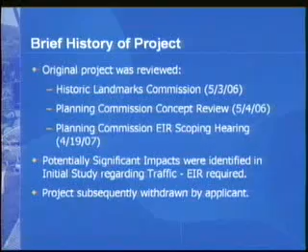Subsequently, the project was withdrawn by the applicant, and a new revised project was submitted. This new revised project has less commercial square footage, the elimination of the live-work units, less parking spaces, and a new traffic analysis was submitted along with the revised project.

Staff reviewed the new project and a new initial study was prepared. No potentially significant impacts related to traffic were identified with the new revised project, and all other potentially significant mitigable impacts remain the same as the previous project that you reviewed. The result is that an EIR is not required and that a mitigated negative declaration was prepared.

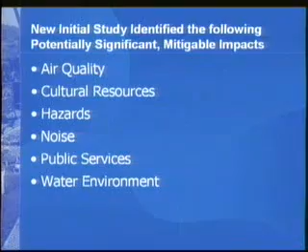This is the same from the previous project. The new initial study identified the following potentially significant mitigable impacts in these areas: air quality, cultural resources, hazards, noise, public services, and water environment. And like I said previously, these are all the same that were included in the original initial study.

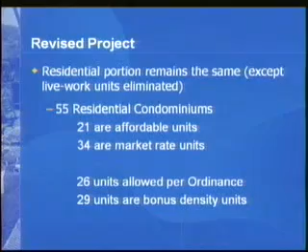A brief overview of the revised project. The residential portion remains the same except for the live-work units, which were eliminated. There continues to be 55 residential condominium units, 21 affordable and 34 market rate. There are 26 units allowed per the ordinance, and 29 units are bonus density units that are being proposed.

For the commercial portion, like I said previously, the elimination of the live-work commercial areas are part of the new project. There's an overall reduction of 10,874 square feet of commercial space, and there's a reduction in the number of parking spaces from 175 to 149.

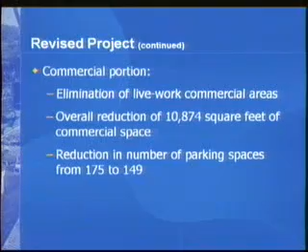The next steps for the project: Today we have our environmental hearing to receive public comment on the draft MND. We will accept written comments through February 4th. The project will then return to the Historic Landmarks Commission. We have a date set for February 6th.

The proposed final MND will be prepared, and we will include responses to the public comments that we received today and through February 4th. Following that, the Planning Commission hearing will be scheduled to consider the final MND and for project approval.

You've received a copy of the HLC minutes from the December 12th meeting. In response to those comments, the applicant has prepared an alternate proposal, and you've received a copy of that in your packet. That consists of 31 residential units. The applicant has requested that the alternate be allowed to be presented today during this hearing. The staff is requesting that you provide comments on the alternate proposal along with the comments on the initial study. That concludes staff's presentation at this time.

Thank you. Thank you, Ms. Kennedy. Are there any questions for staff at this time?

Seeing Mr. White. So, Ms. Kennedy, I'm understanding that the second proposal has not gone back to HLC. Is that right? Right, the alternate that's on the green sheets has not been to HLC yet. And actually, staff has only reviewed it briefly. We have not had a total review by all staff members.

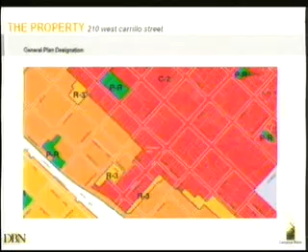I do have with me today Ian Brown from the client organization, Katie O'Reilly-Rogers, and Gerhard Meyer, the lead architect on the project, to answer any questions that you might have. Before we get into it, just an orientation - the project is located on the corner of Carrillo and De La Vina. If I can get technology to work right here.

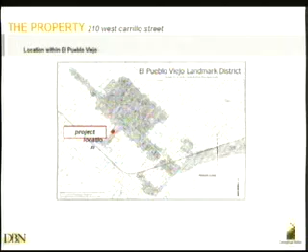And I believe you had a site visit on Tuesday morning, is that correct? That's correct. The project's location relative to El Pueblo Viejo - you'll see the main El Pueblo Viejo area here, and then of course the spur out to Carrillo that encapsulates the downtown area, or the entrance to the CBD. The site itself is an ideal site for transit-oriented smart growth and sustainable development. It's approximately 1.2 acres, 200 feet squared, zoned C2. It's currently a multi-tenanted retail site, and it's a perfect infill opportunity site. It's located on primary transit corridors.

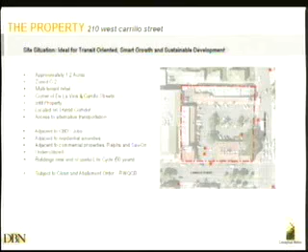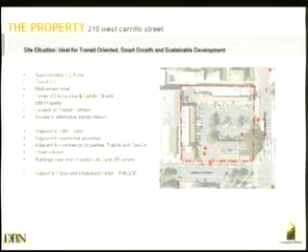It's very contiguous to the local MTD, or the central MTD facility, and other alternative transportation. It's adjacent to the jobs in this community. It's adjacent to many amenities, as you'll see later. And it also is adjacent to commercial properties like Ralph's for food, grocery. It's adjacent to CVS Pharmacy for access to drugs and things. So residents of this site will have wonderful contiguous amenities available to them. The site is currently underutilized. The buildings are near the end of their useful life cycle.

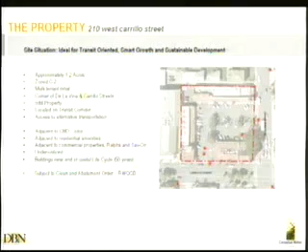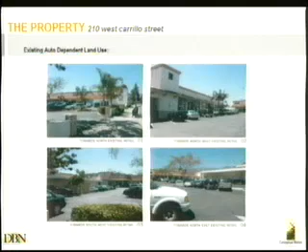And importantly, the site is subject to a cleanup and abatement order by the Regional Water Quality Control Board, and they've been very tolerant with us in terms of the time we're taking thus far on the project to bring it forward, knowing that development of the project is a better mitigation of the brownfields than to try to remedy in place. The existing site is an auto-dependent land use, and it's a product of its time. I know you're well aware of the site, so I won't go on too far from there.

Where we are today - we originally submitted the PRT for this project in November 2005, and as Kathleen said, we reviewed the project with you at the HLC in May 2006. At that time, our conversation in the community was all about housing, if you'll remember, and we were working very hard to see how we could deal with variable density to bring more affordable and smaller units to the community to really respond to the needs of the workforce. After we received your input in May, we developed the application, submitted a formal DART product, and then came to you for an EIR scoping hearing in April of 2007. At which time the focused EIR on traffic was deemed necessary, and we were moving forward.

Well, towards the end of the year, or close to the end of the year, we still hadn't gotten a consultant on board, and we'd recognized the impacts that were potential from the traffic, and we felt it was important to modify the project and bring the intensity of the project down to reduce any potential for traffic impacts. So we did that, and here we are today with the revised program. We will be going back to HLC on February 6th, and your guidance today will really help us, and we hope help the HLC in their deliberations on that day.

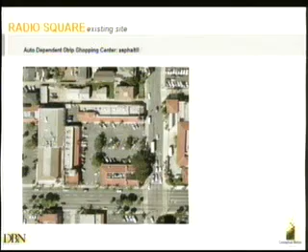The organising principle behind this project from day one and still today is the Paseo and Plaza system that El Pueblo Viejo and the Urban Design Guidelines speak so loudly to, and we continue to retain those elements in the project, whatever decisions and choices we made.

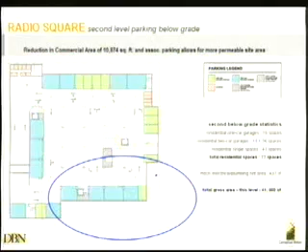One of the advantages of reducing the commercial program is we still park per ordinance, but we reduce the overall footprint of the garage, and it gives us more permeable parking, permeable site area for water quality management, etc. So there are some advantages to this program.

Graphically, you'll see here, this was originally commercial, this was originally commercial, and these units here were the live-work component, and they've simply been reclaimed by the residential program. That's how you see that difference made in order to reduce that 10,974 square feet.

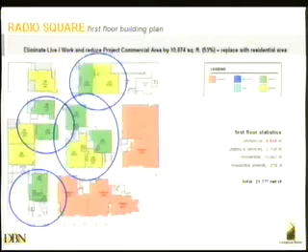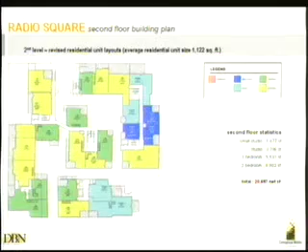Second level, we revised the residential unit layout. The average residential unit size is still 1,122 square feet. It's still small by standards that you're used to seeing and well below your thresholds. And that's also true of the third level and the fourth level.

Some of the comments that have been responded to as the 55-unit design was developed: we reoriented the fourth floor masses towards the project interior. We reduced and varied plate heights throughout the project. Carrillo went from 17 feet to 14 feet plate heights, and the top of the roof on Carrillo was lowered to 50 feet. And you'll see we increased the size of the plaza and simplified the architecture throughout.

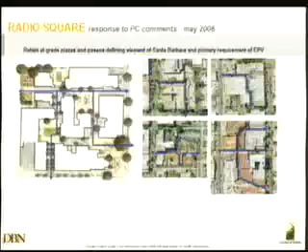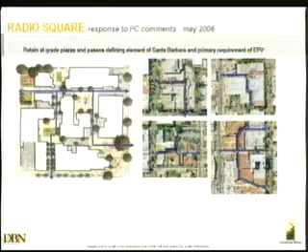To give you an example of the DNA of the project, the plaza system - you see the blue lines indicating the transit routes through the project, and by way of comparison, you can see La Arcada here on the top left. This is the paseo between the hotel that leads down through the back of the State Street properties to Paseo Nuevo, and it connects into the Paseo Nuevo system, and of course this is El Paseo.

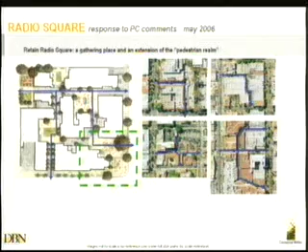So we just wanted to show you quickly and graphically how this project is responding to that central DNA of Santa Barbara, and of course we retained the generous setbacks, particularly at Radio Square.

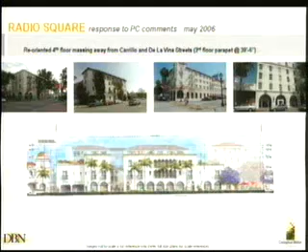Here's a view of the elevations of that project, and you have them in your package, relative to some of the other projects on major corridors in the city of Santa Barbara. It's showing you stylistically and in terms of massing how we're responding to those.

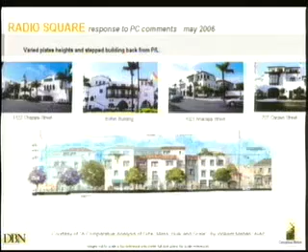And of course, De La Vina is a different environment, and Gerhard will talk about that later. But it calls for a different architectural response. And we've used some photographs here of existing buildings to give you a sense of compatibility with the characteristics of Santa Barbara.

Bill Mahan, when he was planning commissioner, put together a wonderful package that allowed us to quantify and qualitatively analyze our projects for compatibility. He used a term called vertical envelope analysis, or EAR. And this is how the 55-unit project stacks up against that analysis.

You'll see here, if you had an EAR of 0.6, it would be considered high, and 0.4 would be considered low. And the 55-unit Radio Square project was an EAR of 0.54.

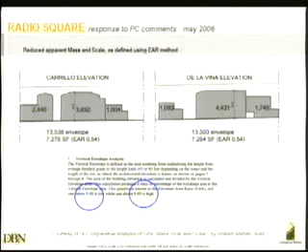I think it's all right.

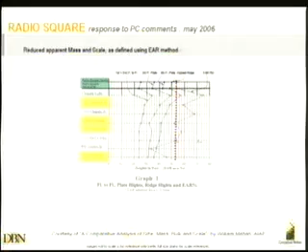The other way to look at this is in graph form. You can see across the top the first and second floor plate heights through to the highest ridge and the EAR. This line represents Radio Square's EAR relative to Chapala Lofts, 1021 Anacapa Street, Chapala Street, the Balboa Building, 1123 Chapala Street, and 2323 De La Vina. We find this a really useful tool as we're designing to see how we're doing.

In addition to the character sketches and perspectives, another way to look at the project is average setbacks. In C2 we don't have any required setbacks, but to give you a sense of the fourth floor, it sets back off of Carrillo on average 41 feet, off of De La Vina on average 16 feet 9, the west boundary 17 feet, and the north boundary 28 feet. So it really sets back in there. You'll see data in your packages showing it occupies a lot coverage of about 39%.

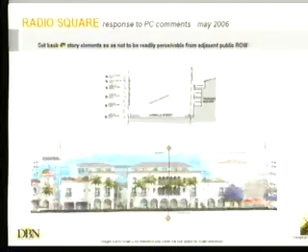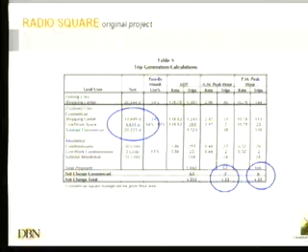One of the things we look for, in your comments with a setback, is that the fourth-story elements are not readily perceivable from the adjacent right-of-way. This is how that works: when you get a pedestrian on the other side of the right-of-way looking at the project, you can see it in section through Carrillo, and the advantage of that step back. You see the same thing on De La Vina, where a third-story parapet basically takes the apparent mass of the fourth floor away on that street, and you'll see that condition throughout. Those are important because they relate to the aesthetics study component, but this is really where most of the impact is.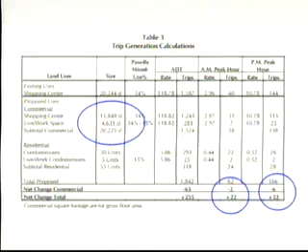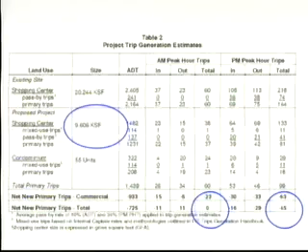We originally had 20,200 square feet of commercial in the project, and the initial study showed we expected about plus 22 trips AM and PM peak hour, distributed through the intersections. It was going to exceed thresholds, so we pulled those back. The commercial program now calls for 9,606 square feet. We have no additional AM peak hour trips, and our PM peak hour trips are reduced by minus 45. So there are quantitative measurements showing we're able to modify the project to a point where we wouldn't have cumulative impacts.

So on April 19, the mandatory findings of significance called for the potential for those impacts, and the document you have before you today has taken that potential away in the mandatory findings report.

I will get to that other point.

A lot of time has gone by since November 2005, and particularly over the last few months we've been getting a lot of feedback from the community and the constituents. We talk to them all and actively engage with them. Since we submitted this project, we went back to HLC in December 12, and they basically hardened a stance against the project, effectively saying it will not meet the HLC guidelines or ordinance requirements. The project is too big and not compatible with the neighborhood or the preservation ordinance, neighborhood preservation ordinance, and the urban design guidelines.

The massing is too large and would benefit from a reduction in the number of units. They'd like us to refine and keep the Plaza and Paseo elements, keep Radio Square on the corner, retain the below-grade parking, and retain the pedestrian experience that is such an important part of the project, and we will always do that. They indicated the additional affordable housing was not supportable as an offset against the larger project, and they were very clear about that.

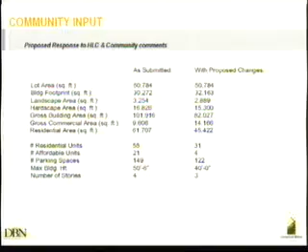The result is 31 residential units using the variable density model and 15% affordable housing, which is 4 residences. Our parking spaces come down to 122, and that's per ordinance, and our maximum building height and maximum stories are 40 and 3 respectively.

I'll have Gerhard go through the plan, and then I'll come back after that and continue the comparison.

Which plan are we going to see - changes from the previous plan, plus the new one? Yes, you're going to see proposed changes, correct. Plus the new plan? Yes. Plus the 3-story plan? Yes.

All right, thank you. Chairman Myers, fellow commissioners, good afternoon. This is all the 31-unit program, so this is a presentation about the revised scheme.

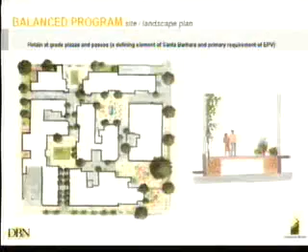If we look at the site plan, it doesn't look much different from what we had before. We have retained the paseo system and the courtyards to the extent that they have existed many times before. I don't want to elaborate there, but let me just point out 2 things.

The success of a paseo system, in my opinion, depends on 2 things. Number one, how logically it connects to the existing pedestrian infrastructure - in other words, how much the paseos make sense where they go. Typically, paseos allow you to cut off a corner or to walk mid-block to some point of interest. That's how the good Santa Barbara paseos, Victoria Court, or the old paseo function.

We have St. Vincent Avenue below Carrillo here that continues in this paseo north. We have a paseo paralleling the northern property lines that connects with an existing paseo not on our property. So this would be a good way of cutting through the project, and we have 2 paseos that parallel Carrillo Street and De La Vina Street.

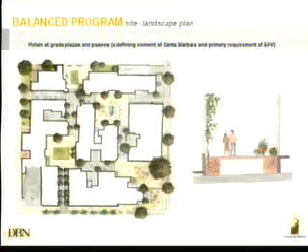That's one feature. The second aspect is to which extent we succeed in making the paseos feel like an extension of a public realm, and not just the interior of a project that the public is allowed to be in. We achieve this by having our parking podium depressed below the actual walking surface. So when we walk in our paseos, we'll have real pavement, and we'll have soil pockets that allow us to grow real plants right out of the dirt, so it feels not like you're on top of a parking garage with potted plants, but like you're walking on real land.

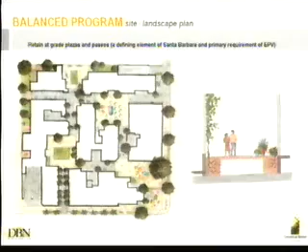Now, the amount of penetration we get by doing so results in one thing I'd suggest we look at this project as: a collection of individual building blocks, not one big project. It's actually several building blocks, and we've gone to great lengths to design them so that in the end they achieve the appearance of an ensemble that has grown over time, as if it had happened in the past by various architects, various building owners. It's kind of a virtual arrangement that way, because with zoning rules and parking we know it's not possible, but we want this to feel authentic, like State Street, with various different buildings - not one design that has a high level of articulation and still feels like one big project.

Below grade, we have a reduced residential program. The lowest level of parking is the residential parking. The footprint is much reduced - you see a vast amount of unexcavated area, and we have the entire garage pushed back in the front. That gives us a great ability to have better water infiltration and better water quality management measures.

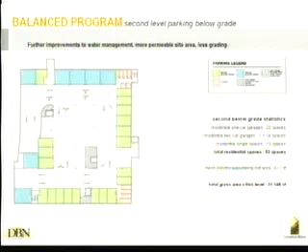The commercial parking level is still pushed back. You can see some of the utilities buried in that dirt buffer - this is grease separators and electrical utilities. This is the way the utilities normally like to do it, so we have an easier way of handling our utilities.

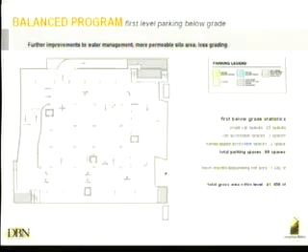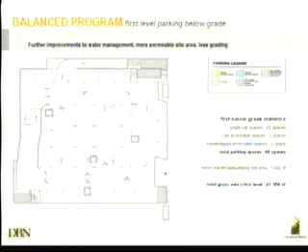We have an in and out of Carrillo Street, and we have an exit ramp on the northern property line. We see that exit ramp as a public benefit because it allows you to circle back into the garage without forcing anybody to go through the neighborhood. Not having this exit ramp would force somebody to come out here, and if they want to go back into the garage, they'd have to go all the way into the neighborhood and come back to enter the garage. So we think this is an important feature to limit circulation around this building block and not drag it into the adjacent neighborhood.

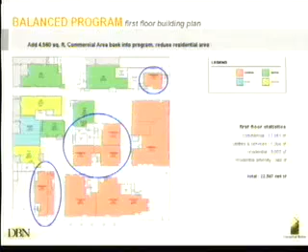The ground floor - we have a reduced residential program, and to compensate for that, we introduced an additional 4,560 square feet of commercial area back into the project. The previous project had a much higher degree of residential area on the ground floor. We think this is an advantage because if you imagine a pedestrian walking down, they would probably choose to enter the project because across the street there's the back end of Ralph's - not a very pleasant site. So you would enter this project and walk between two commercial street fronts, like in Paseo Nuevo, and basically cross through the block. So we think having the opposing commercial areas there is actually a great advantage to the streetscape.

The upper level - we have reduced the number of residential units. We still have a unit mix, not just large units. I believe it's 16 studios, 11 one-bedroom apartments, 8 two-bedroom apartments. We have vastly increased the setback on the northern property line towards that residential neighborhood, and we're averaging a unit size of 1,465 square feet, which is less than 85% of the zoning lot area that you're required to hold it against. So this is kind of like a measuring standard for how big the units are.

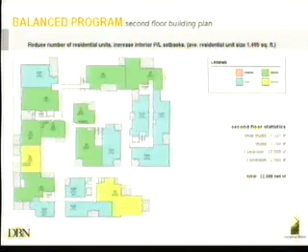I want to talk about the plazas that we included. The plazas actually have a big benefit on the livability in this project because if you notice, every one of those residential units basically has a corner - some have more than one corner, some actually get light from 3 sides. So living in those units will feel very different than living in a normal apartment, where you're just limited to that one view out the primary window front. Here you get light from all sides, you can follow the sun around your unit, you get different views, and every one of those apartments benefits from the extended view into that plaza or courtyard.

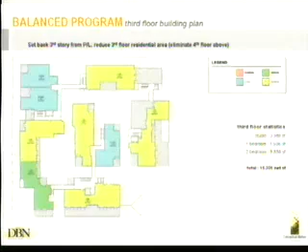The third floor - we have further increased the setbacks from the property line. We are now completely away from Carrillo Street and completely away from De La Vina Street, with the exception of one component. So on those two public right-of-ways, we have 2-story elevations. We still have a unit mix on the third floor rather than just large luxury units on the top floor - we have studios, 1-bedrooms and 2-bedroom apartments mixed up. The total area of the third floor is about 3,000 square feet less than the previous project, and the fourth floor is completely eliminated.

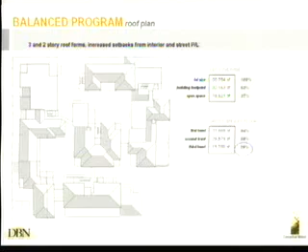The roof form then consists of 3- and 2-story roofs. We notice the increased setbacks from the interior street and from the property line. If we look at the lot coverage numbers, they are I believe very favorable. On the third level, 39% coverage speaks to the amount of open space and setbacks that we've actually designed this project to.

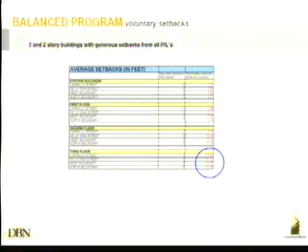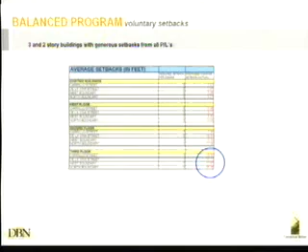Another way to look at that is the average setbacks on the third and second floor. If you compare the third floor setbacks to the existing building - which doesn't have a third floor, so let's not compare it - the average setback numbers are fairly generous on the third floor. And again, as Steve pointed out in C2 we don't have any required setbacks, but we still went to great effort to push the building away from the street and the neighboring properties.

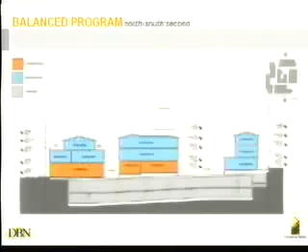If we look at the north-south cross-section, the first thing I want to point out is that increased soil buffer. This is Carrillo Street, and this is the adjacent neighbor up on De La Vina Street. The soil buffer allows us to let the water run off and get naturally absorbed in this area.

Again, we have the parking podium depressed into the ground, and our walking surface is actually about 3 feet higher. That gives us the ability to naturally plant. It also separates these buildings from each other, and I would like us to look at these buildings as a series of individual buildings, not as one big project, as I pointed out. Each one of those individual buildings is measured from its relative elevation, and it never crosses 40 feet height.

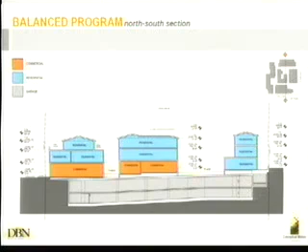This line is the 60 feet envelope that is still valid according to current zoning. Each building stacks up roughly as a 14-foot commercial area, 11 to 12 residential, 8 to 9-foot plate, and then a vault area to a 39.5-foot ridge. With that reduced building height, the proportions of the courtyard spaces are very generous, and you can imagine the ample sunlight and exposure people in those courtyards will get.

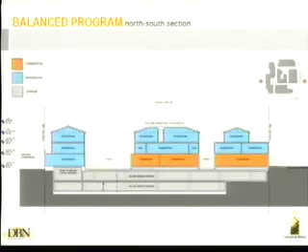This is an east-west section. Similar story as before. I just wanted to point out to relate this to the domed form on the CVS building. This is a height that the entire project then respects all the way across. Again, two-story parking. The lowest level, the residential program, allows us a smaller footprint, so there's less excavation on the site.

Carrillo Street elevation. Carrillo Street is the entrance to the central business district, and emotionally we always wanted to relate this building not to the immediate context on Carrillo Street, which is like a Jiffy Lube across the corner, or the parking lot of a strip mall, but emotionally we want this building to belong to the stretch of Carrillo Street between Chapala and Anacapa Street. That's where it's a grand boulevard, a worthy entrance to the central business district. Even with the reduced height of 3 stories, this building still aspires to belong to that language.

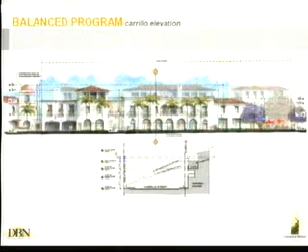And on those blocks, there are 2-story buildings. It's not just a function of height, whether you have that stature to give it the entrance to the central business district. This diagram shows you what happened by eliminating the top floor. This was the previous condition, and lowering the building by an entire story gives you that much more exposure to the sky.

De La Vina Street was always a completely different street. We have, of course, Radio Square on the corner here. De La Vina Street is a neighborhood collector street, so we wanted to treat it differently. Again, it aspires not to its immediate context, but to the context a little bit further up and down the block, where it's actually a residential street. So this series of buildings is designed to look as if it had been happening over time by individual owners. One owner would have built this building, the next owner would have built this building, and so forth.

How this looks in diagram, should a person actually choose to be here, because this is right in front of the Ralph's loading dock - but if somebody walks along that side of the street, then the reduced height again allows a better exposure to the sky. I just wanted to point out the reduced building form next to the Victorian house on the northern property line. The size of this volume is almost identical to the size of the volume of the house.

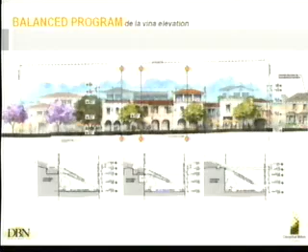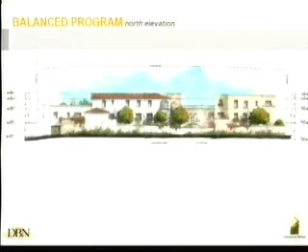So we're basically having an equal match there now, whereas previously we had a bigger building mass there. This is the elevation of the northern property line. Again, we have pushed the building back. It is lower by an entire story, and we have articulated the wall on that property line. Previously, we've always heard that the neighboring property really doesn't want to connect here, so we have a wall closing it all off right now, and the wall is relatively low, in some portions even lower than the current wall of the current strip mall.

And this is the elevation to the western property line. This is not going to be seen by too many people, because unless somebody chooses to walk on that lost paseo - once we connect it, perhaps people will walk along that. This is on the property line next to the drugstore. But still, we are proceeding with articulating the building as if it had been built over time as individual structures. And we have a fair amount of articulation just by implying that natural, virtual building language over the elevation.

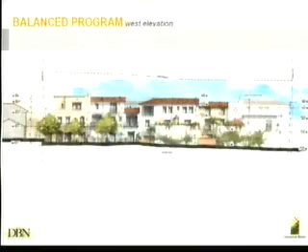Okay, Mr. Yates, appreciate the time that you're allowing us. Thank you. So we'll quickly just do some comparisons.

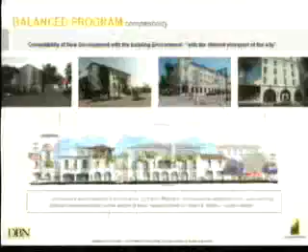First of all, once again, the plazas that are such a defining element of this community are retained in the project with the proposed changes. Here's that same view again with those adjacent buildings, looking at it with the two-story project versus the submitted application. And of course, De La Vina begins to respond the same way. You're now becoming familiar with those elevations.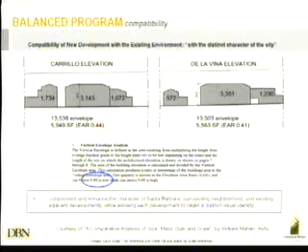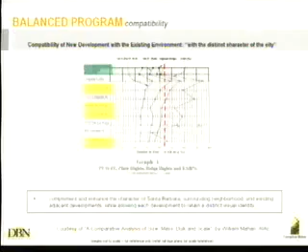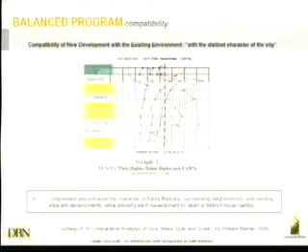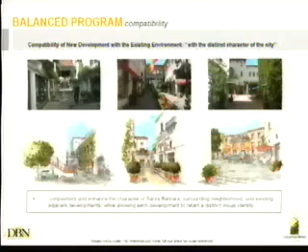Just quickly, a couple of qualitative images. These are the interior plazas, and I want to show you how we've drawn inspiration from the existing fabric of Santa Barbara. You'll see that through different angles and the amount of pedestrian open space that is in the project.

Compatibility with the neighbors and being sensitive to the neighbors. This is on Carrillo Street, the adjacent building. This is the building on our property now that would be demolished, and this is a much more sensitive and appropriate response to that building than exists today. As Gerhard mentioned, now a really nice, wonderful relationship. That's the eave of the adjacent building there in the photograph, and that's our property line there. So I think we've been very successful in having a more balanced approach and response to our neighbors with this version of the project.

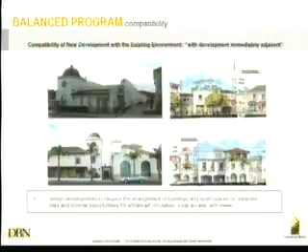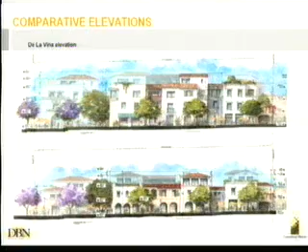Just quickly, comparatively, you can see it in elevation form - the project as submitted and the project as with the proposed changes. I'll run through each of the sections there, and you can see a demonstrable change to the mass and scale of the project as a result. We also look at the 3- and 4-story design from Carrillo, and we see the change to the 2- and 3-story design.

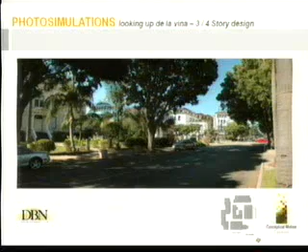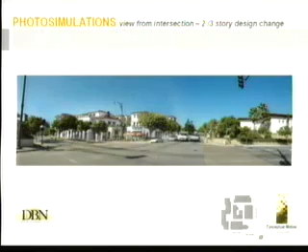We look at the same thing from De La Vina, looking back from 3-4 to 2-3, and this is powerful when you see this from De La Vina looking down, the relationship of the projects. And then more immediately on the corner, the 4-3 project and the 3-2 project. You'll notice on the 3-2 project now our relative heights compared to Ralph's right here across that Carrillo intersection. So these are the aesthetic massing qualities that we're looking at in an attempt to be more balanced in our response to the community.

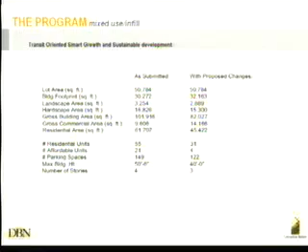You saw this chart earlier. It does affect the program. We're a 31-unit project versus a 55-unit project. There's some important things to talk about here, though.

Before I go there, I just wanted to make sure you were aware on the inclusionary housing plan, we still retain the small unit approach - studios, 1 bedrooms and 2 bedrooms. So we've got 10 market rate studios, 10 market rate 1 bedrooms, 7 market rate 2 bedrooms, and then the 4 affordable units that reflect that same mix. So we didn't revert back to the fat, oversized townhomes.

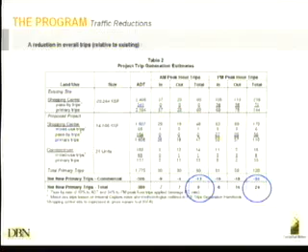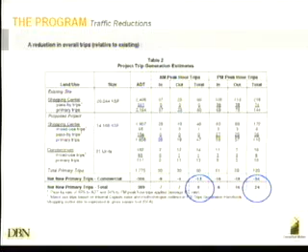Very important, because today's about environmental issues. We went ahead and did a traffic analysis on these proposed changes to reassure you that if you felt this was the more balanced and appropriate response to the community, we would be in the condition supported by the negative declaration, where we have no additional traffic trips and we're below any cumulative thresholds.

So just an important thing I always like to remind you - the project doesn't require any design modifications other than that for the affordable housing. It really does respond to all your policies and ordinances. And...

I've spent a lot of sleepless nights thinking about this project. In 2005, when we first began looking at this, the conversation was all about housing, and we really came forward with what we thought was an innovative approach to reducing unit size and bringing more affordability to projects. Well, times change. But does that mean we have to change our principles? And when we look at how we respond to the community in a balanced way, what principles are intact? The project still meets many standards that are very, very important to us.

It has a mix of land use. It takes advantage of compact building design. It has a range of housing types. It has that pedestrian realm and the walkable neighborhoods, and it certainly has a strong sense of place that's characteristic of Santa Barbara. Is it still a sustainable project?

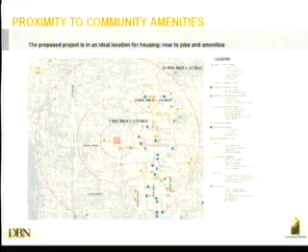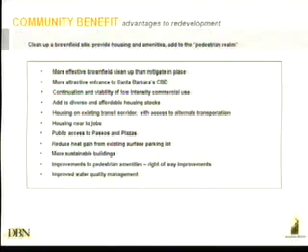Back to the original premise, the site selection is so important in terms of where to put housing in this community. It has amenities, it's close to jobs, it's close to alternative transportation. Those things don't go away. So we have a cleanup of a brownfield site, we're providing housing and amenities, and we're adding to the pedestrian realm in a really powerful way. And of course, that powerful way is certainly responding to the urban design principles that are a part of sustainable Santa Barbara.

I missed this slide, and I just wanted to finish on this before we open up to comment. Our first responsibility, as we think about how to respond to the environment that we're faced with, is to the environment—bringing forward projects that are smart growth, that respond to global warming issues, respond to community wellness issues, and respond to the need to provide housing. That's our first responsibility. Both projects do that.

Our second responsibility is to respond to our community. At the moment, the community is sending us mixed messages, and sometimes polemic messages, about how they would want us to move forward. The way we sleep at night is to step back and take the most balanced approach to those conflicting values and priorities. That's what we're sincerely trying to do today, and it's what we're hoping to get feedback from you on as it relates to that.

And of course, we all want to build a project that not only meets our technical criteria, but is also one that the entire community is going to be happy that's built. I don't want my friends and colleagues and people who I might disagree with, but nevertheless respect, driving by this building for the next 50 years saying, 'Steve, damn him.'